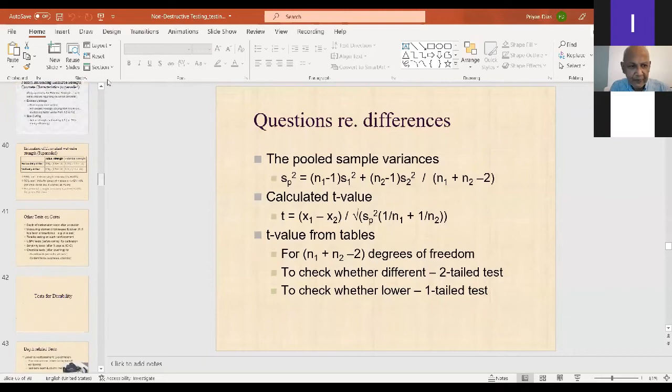So this is non-destructive testing and also assessment, meaning judging, right? This is part of an overall appraisal of structures. Non-destructive testing means the concrete is already in the structure, and you can appraise it at different stages. One very common case is if the cube test failed, as I mentioned in my last lecture, then you can look at the concrete in the structure. But if there are changes of use at midlife, or if the structure is very old and you have to decide whether to demolish it or not, then also you can do non-destructive testing.

Now, there are two broad ways of doing this. One is to actually sample the structure and get material properties, which is what I'm focusing on today, mostly with respect to concrete properties, although those concrete properties may not be the most important, and I will tell you about that also. Then you take these material properties and check whether they are sufficient, or use those properties to do structural calculations. So that is sampling and testing material properties. The other approach is to completely forget about the materials and do some kind of load testing with an expected load, and then see whether the structure is behaving okay.

Now, this non-destructive testing requires a lot of interpretation, and it is not as well accepted — there are sometimes disagreements — compared to, for example, something like a cube test. But the problem is that the cube test actually tells us about the concrete that was delivered to the structure. If you want to find out about the concrete in the structure itself, then maybe if you take something like a core, you will get a fairly direct idea about the in situ strength of the concrete. But even if you know the in situ strength of the concrete, you do not have any idea about the design load capability, for example, of the structural member. So for that, of course, you need to do a load test. Now I am going to concentrate on this area today.

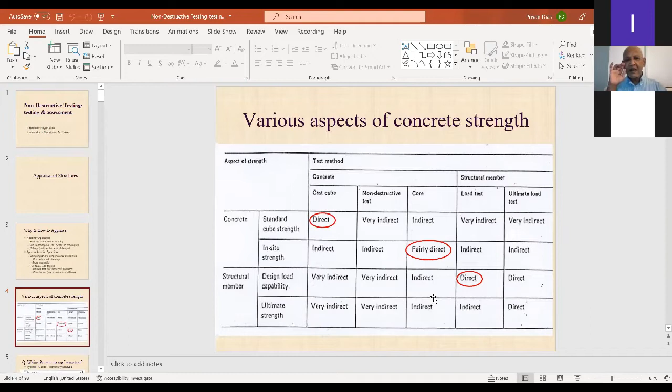Right now, I think some of you who have heard my lectures might be familiar with this slide. Okay, first let me use the pointer.

Now this is a simple slab. Those days we used grade 20 also, and steel FY 460, with these bar diameters and spacing. If all these parameters are at their design values, let us say the moment of resistance is 14.35, and we divide that moment of resistance by 14.35 itself. So the moment of resistance ratio is unity, with all parameters at these stated values. Now we can change one parameter at a time and see what happens to the moment of resistance ratio.

For example, if you think about the cube strength, instead of using 20, you make it half of that, that is 10 MPa, or you can make it double, that is 40 MPa. So you can see the cube strength has very little influence on the moment of resistance of a slab.

On the other hand, if you change the bar diameter, that will have a huge effect on the moment of resistance of a slab, or the depth of the slab, or the yield strength. So it is the steel properties mostly that govern the behavior of flexural members, especially slabs.

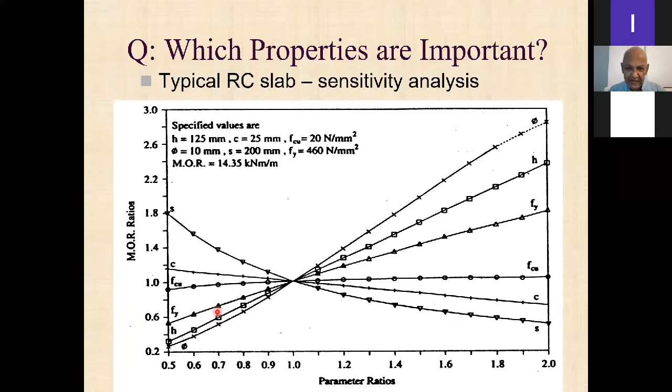Of course, where columns are concerned, the concrete is much more important, because concrete makes contributions of 69% and 53% as your reinforcement ratio goes from 1% to 2%. So concrete becomes much more important there, but much less for flexural members.

So when we are doing non-destructive testing, we should look at some of these other things also, steel properties and properties like cover, because cover will tell us, especially for structures that are mid-age or old age, about the durability conditions in those situations.

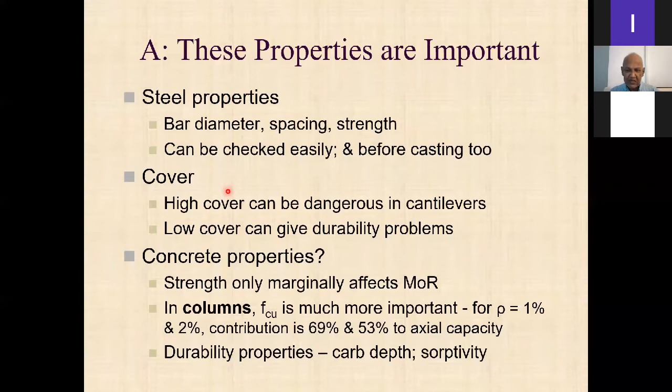So now there are different types of in situ tests. One is you have cores. Now the cores are like the gold standard, because you're actually taking the concrete and testing the strength, which is mostly what we are worried about. But there are others such as the rebound hammer test and ultrasonic pulse velocity, which give us a correlation with strength. So they are indirect tests.

So one way of doing it is to do some cores plus more indirect tests, and you calibrate with the core test results.

Now sometimes many contractors want to get away, especially when the cube test fails, with using indirect tests alone. This, of course, I strongly advise against, but in a comparative mode it is okay.

In other words, if you know that there is a particular place in the slab where the concrete is satisfactory because the cube test has passed, and another part where the concrete is suspect because the cube test has not passed, then you can do a rebound test and compare statistically whether there is a significant difference. I will go through that calculation.

I think some of you, I don't know whether you belong to those companies, sometimes they ask me to do this. Or if there are existing cubes that have not been crushed yet, you can think about calibration with that. And as a last resort, which I don't generally use now, you use an existing correlation, because I'll tell you about some of the problems regarding those correlations.

I have mentioned it here, I will highlight it later on. This gives you some idea, if you have a standard core like 100 or 150 millimeters, what is the level of reliability.

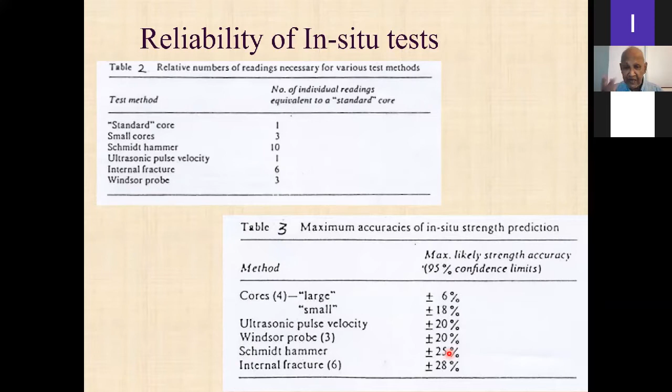So we make some allowance for that, especially when we are using the indirect tests, right?

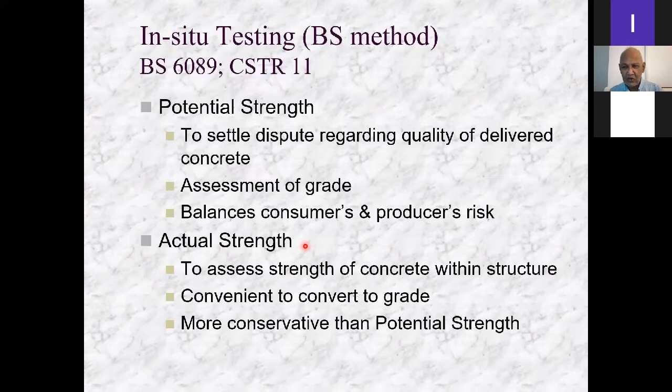Okay, so now we go to interpretation. Now there are some slides which I have blanked out, because these were done a bit earlier, Concrete Society Technical Report 11, BS 6089. In those days when you took cores, there was an idea about potential strength and actual strength. We don't go to that anymore, but this is just in case you want to look at these slides. Typically potential strength means, you are comparing the concrete in the structure with concrete that has been delivered, right? So you cannot expect the concrete grade to be the same in the structure as in the cube, because the cube is well cured and tested under lab conditions.

And we normally use a safety factor for that also. We know that the concrete strength in the structure is something where the FCU value is divided by 1.5, the partial safety factor for concrete materials. So if we get, say, 3 cores from the structure, and there is a dispute about the concrete that has been supplied, that mean strength - this is the old way. The new way of doing it is a bit different, I'll tell you that.

So then the mean strength you multiply by 1.3, and that is called the potential strength. If the potential strength is greater than the characteristic strength, we say compliance is met. If it is less than 0.85 times the characteristic strength, compliance is not met. And in between, of course, there is some area of uncertainty, right?

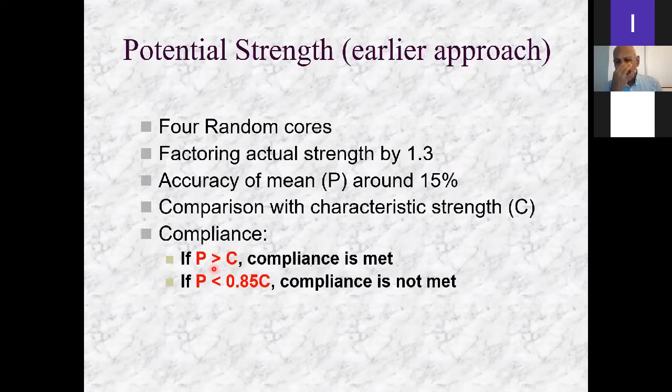Okay, now this is a bit of a different scenario - this is the new Eurocode. First of all, they say that the in situ strength - earlier we had this 1.3 thing, right? Here it is slightly different. If you take 1 divided by 0.85, you don't get 1.3, you get something like 1.17. So this is a bit more conservative, bit more conservative. And anyway, it also gives you a table.

So these are the standard grades, and depending on whether it is a cylinder or a cube - let's say this is grade 20 cylinder, grade 25 cube, that's the way it's mentioned. So in situ, you take 0.85 of that. So the grade you expect in the structure is only 17 if it's cylinder strength, or 21 if it's cube strength. That is used in the interpretation of these results.

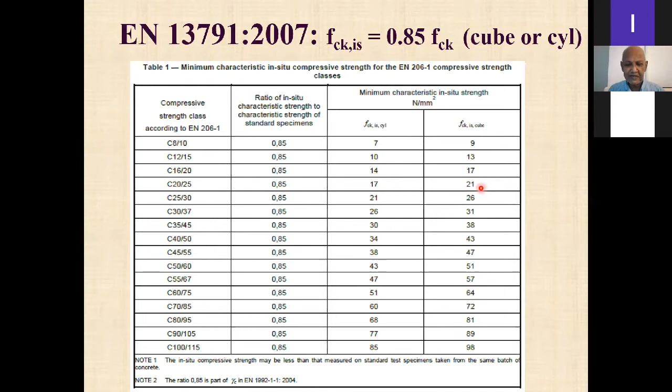So in an old structure, you can either use cores or use a calibrated method. Now if you use cores, you have something called approach A and approach B. Approach A means you are prepared to take 15 or more cores - very few people want to do that. But I remember many years ago, we looked at the Puttalam Cement Company buildings, there was a major renovation. I think we took a lot of cores there, but unfortunately this code was not available, so we did various other things.

Now, if you have fewer cores, 3 to 14 cores, you can use approach B, but it will be more conservative. I mean, you can get a higher in situ grade if you use approach A. So if you spend more time, effort and money, then you can get a better result. If you use less time, effort and money, then you have to be a bit more careful, and the estimated strength will typically be less than if you use the other approach.

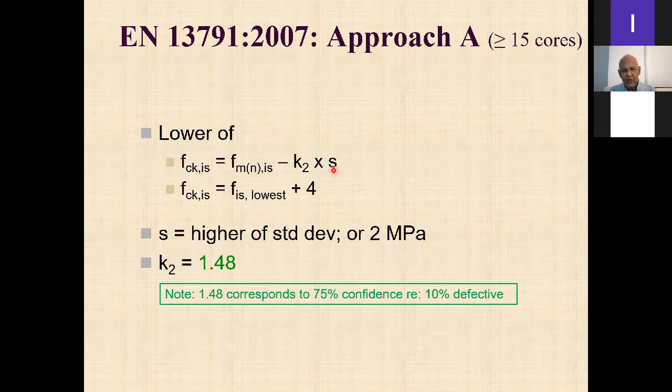And of course, the in situ characteristic strength should be the lower of this one or this one. This S value, you can actually calculate, or if it is less than 2 MPa, you have to use 2 MPa. And the K2 value that is used is 1.48.

Now, if you have less than 15 cores, the formula is similar to what you have there. Once again, you find the mean strength and you subtract. Now, the standard deviation is not there because there aren't enough cores in order to find the standard deviation. So depending on the number of cores you take, between 3 to 14, your K value will be very high here, but less here. So this will be the computed in situ strength.

Characteristic strength. But also, if the lowest strength plus 4 is smaller than this, then you have to take that one. So, like I have said before, if you take a less number of cores, because of these K values, the in situ strength will be underestimated. So it depends - you can take a fewer number of cores and get a smaller in situ strength, or you can take 15 cores and get a maybe better in situ strength. Depends on what you want.

Okay, so this is an example. Let's say this example, how do we implement this? So this is not a cube test, this is a core from which you get an equivalent cube strength. So there's a way to convert that. I might be able to cover some of that also.

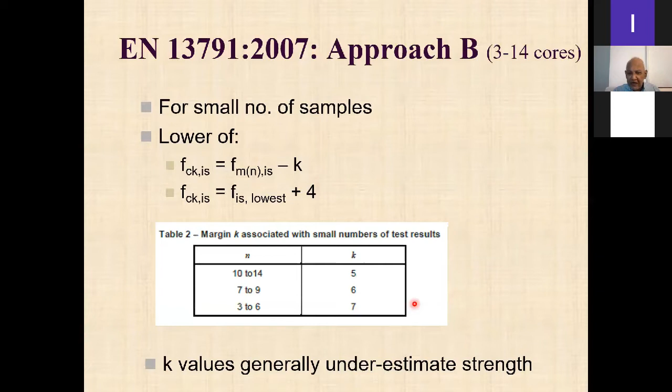Out of all of these things, the minimum is that. Now, what is the in situ characteristic strength of this? It's the mean in situ strength minus 6. Where do I get 6 from? If I go up there, n equals 7, so from 7 to 9 the K value will be 6. So 21.49 minus 6 will give me that value.

Or you can take this minimum and add 4 to this - that is, the lowest value plus 4. You get that one. But you must take the smaller of these two. So this is the one that you have to take.

Now this is the in situ characteristic strength. So what is the grade? In situ characteristic strength divided by 0.85. Remember I told you about that 0.85 factor that is used in this EN standard, whatever number it is, 17 something. So this is the grade.

So as you can see, you can use this grade in a calculation - if it is a building in midlife and you want to estimate whether it can accommodate a change of use. So if you have something like this, either you take this exact value or you say that it is grade 18 or grade 17.5. We cannot say it's grade 20, it's less than that. So this is how to get an in situ strength, in situ characteristic strength, and then convert it to a grade in case you want to use it in a design calculation.

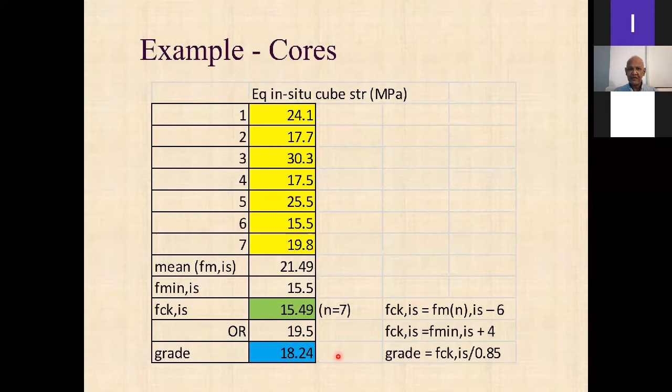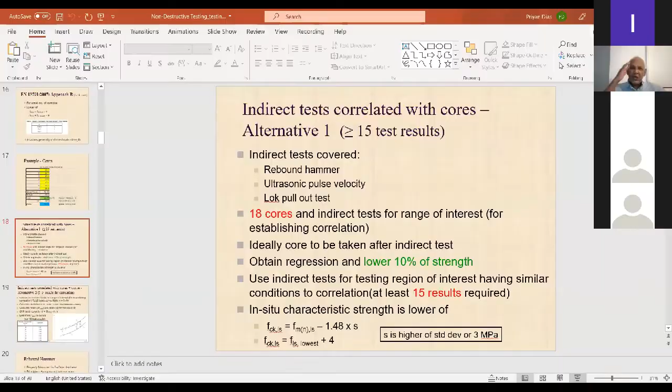Now these are alternative, indirect tests that are correlated with cores. There are these different kinds of tests that can be done. Here also for the correlation, you have to have not 15 but 18 cores, so a large number of cores. So actually this is useful, but to do the correlation we need 18 cores, so maybe not many people might be interested in doing this.

This is where I finished, I think.

Once again, you have to follow this, a similar thing as what we had earlier. Earlier, the minimum standard deviation was 2 MPa; now it is made 3 MPa. But unfortunately, you have to get a regression, and you have to take what is called the lower 10% of strength. I'll give you a real example to demonstrate that a bit later on.

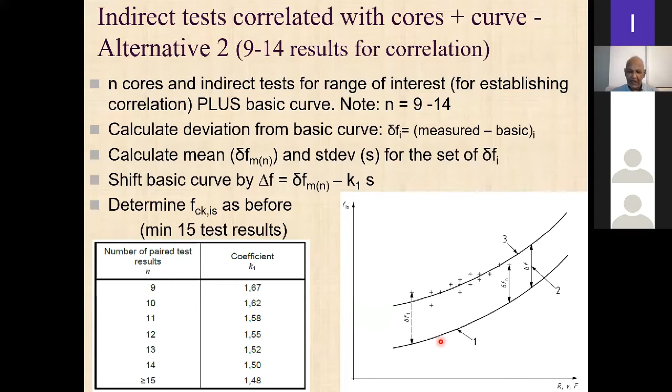This is how you do the calibration. Now, before we get to that, I will just show you some straightforward things - these different types of indirect tests that are available. So in a rebound hammer, what you actually measure is surface hardness, not the strength.

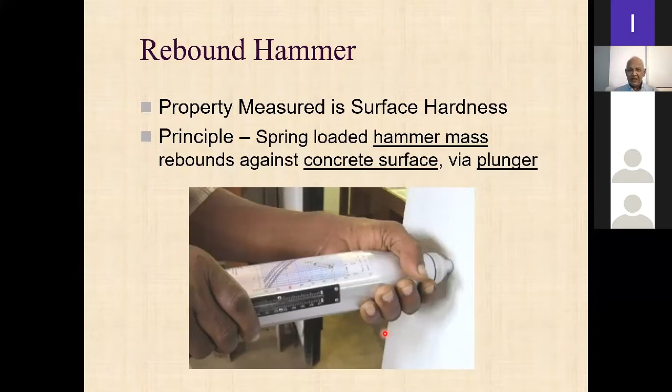Typically, you have to take 9 to 25 readings over an area of 300 square millimeters, that is 300 by 300. Typically, people take about 12 readings.

This result is influenced by the hammer orientation, whether it is horizontal or vertical, upwards or downwards. There will also be things like age, surface carbonation, moisture condition, and coarse aggregate type. All of these things will influence the calibration.

That is why I am not happy when people say they have taken a set of rebound hammer readings using a calibration chart provided by the rebound hammer supplier. Okay, but all of these factors will be different.

So actually you should try to ensure that the surface is dry. But then you have to look at things like how old the concrete is, what the coarse aggregate type is, and hammer orientation. The difference for hammer orientation, we can rely on what the rebound hammer supplier says, but everything else will be different.

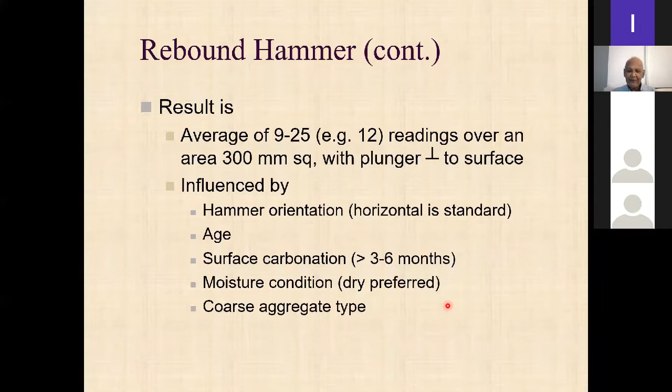Let me give you an example. This is from the early days, many years ago, when I just started at Moratuwa University. We did rebound number versus cube strength just to see. This is published in The Engineer. You can see that the cube strength varies with the rebound number.

Now it so happened that I thought you should have a straight line like this. Now I will show you what the Eurocode correlation is. It's not a straight line.

The other thing I want to show here is that we had some cubes that were wet and some cubes that were dry, in order to get a spread of strengths also. Now this correlation line is drawn only between rebound number and cube strength for the dry cubes.

Now if you take the wet cubes, they have a range of strengths, but a very small range in rebound number. And the rebound number is fairly low also. Which means that strength has no effect on the rebound number in this case.

So the lesson from this is, if you are taking rebound hammer readings, you have to ensure that the surface is dry. If it is a wet surface, then the rebound number will only be a reflection of that wet surface, the hardness of which will be reduced because of the moisture.

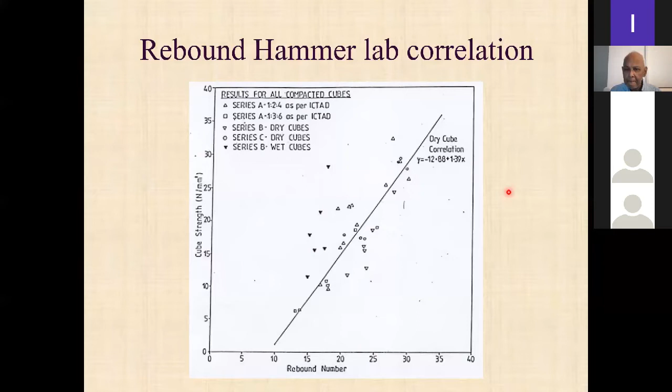Now, here you do not in fact find a straight line, in the Eurocode. There's a slight change here, the inclination changes slightly.

So what we are doing is, if we are getting a correlation between rebound number and strength, we have to get that correlation using 18 cores, and we have to find the difference between each one of those points and this line, so that we draw a line that is parallel to this. We cannot draw a straight line just using these points.

You might think that we get a set of points here and we just draw a straight line through that. No, you cannot do that. The code forces you to maintain this slope, this shape. That is the idea behind the correlation between this indirect test and the strength.

So your age and your carbonation and all of those factors will be different. That's why it's encouraging you to do this correlation. But this shape is only shifted vertically by a set amount. This slope remains constant, this slope remains also constant.

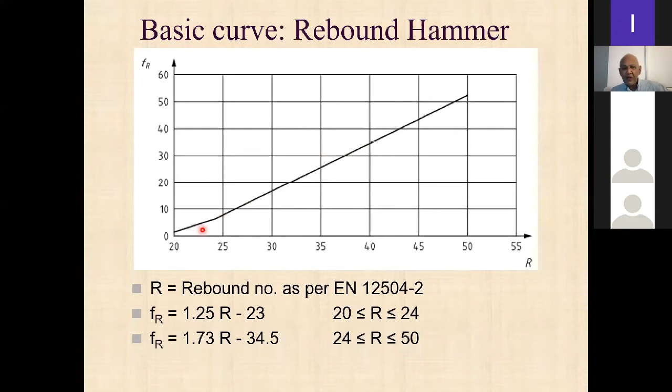Now, where ultrasonic pulse velocity is concerned, you have a pulse that passes between two transducers. The results are influenced by things like reinforcement, micro cracking, and moisture condition. The moisture condition is very important.

Now, in those days, people thought that the relationship between strength and this pulse velocity was given by a logarithmic expression.

So pulse velocity is on a natural scale, cube strength is on a log scale, right? This is from a very old paper, I think, not one of mine.

Let's say you have a wet cube strength here, and concrete gets put into a structure. The actual core strength will be here. So there will be a drop in strength because we cannot expect the strength in the concrete to be the strength that is in the lab. There will be this drop because of that. But separately, if you do a lab correlation, you will get something like that.

And this loss is the pulse velocity difference from the strength loss. In other words, this is the lab value, and this is the strength in the structure. So that pulse velocity loss is because of the change in strength.

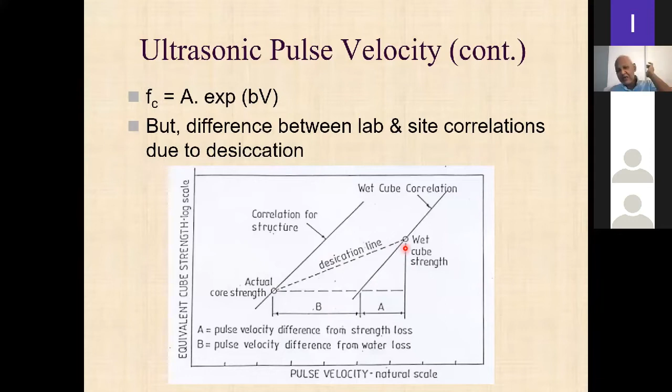I think this is from an early paper by a fellow called Thompson. Now, we actually did this - I think this is a structure that we investigated. We tried to use this, though in those days we did not have this line.

this effect. So this was a wet cube correlation. Separately in the lab, we also got a dry cube correlation like this. Now we got some pulse velocity and core test results from the structure.

So what we did is, in order to get this correlation line for the structure - well, those days we didn't take... now you're supposed to take 18 cores to get this correlation. So those days we would have taken maybe about 8 or 10 cores. So you have 8 or 10 strength readings and 8 or 10 pulse velocity readings. Now actually you can draw y equals mx plus c through that.

But here we are maintaining this m the same as this m in order to make this a parallel shift. And then you can get the optimum value of the intercept by doing a sum of squares thing or whatever.

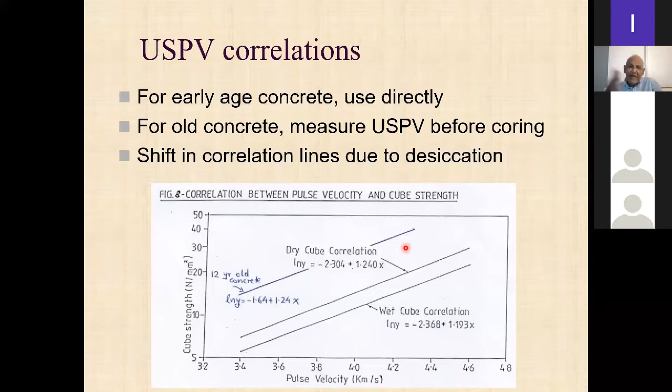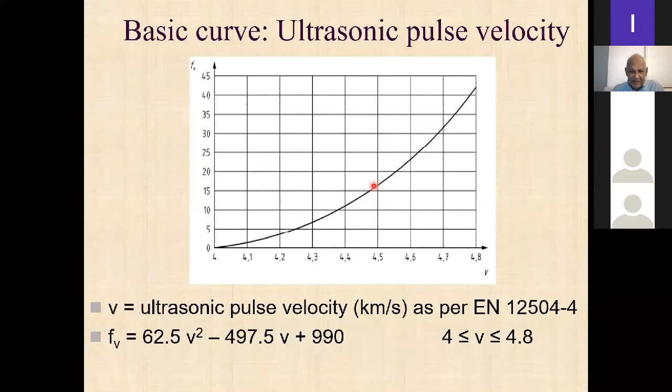So like I said, this is the basic curve. So when you get these correlation lines, you cannot move away from the shape of the basic curve. That is the main story here. And this is for the pull-out force, which we don't do very much.

Okay, now so when I do the examples, I will give you examples of these various things. Now, this thing I covered in my earlier lecture also.

If there is a dispute on cube test results, if you have 15 or more core test data, once again, then your in situ mean strength should be greater than or equal to 0.85 times characteristic strength.

Let's say if it's a grade 25 concrete, then you find the standard deviation from this. Then the in situ strength should be greater than or equal to this value, in order to accept the concrete. And in addition, the lowest in situ strength that you get should not be lower than this. Then you can say, well, the concrete that was delivered by the supplier, in fact, has this FCK value.

Now, suppose you have 15 or more indirect test data and 2 cores taken from the lowest strength areas. So what you do is you do, let's say, 15 rebound hammer tests. You take the 2 lowest rebound hammer values, take those areas, take 2 cores, 1 each from those 2 areas. Then the lowest value of the in situ strength.

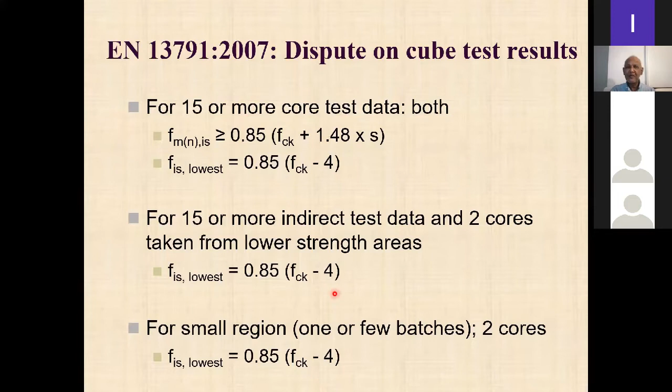Now I'm going to give you some examples, and these examples are wide ranging. So let's see whether we can finish. I better not ask questions because there are a whole number of you who have joined, and then it will be not manageable.

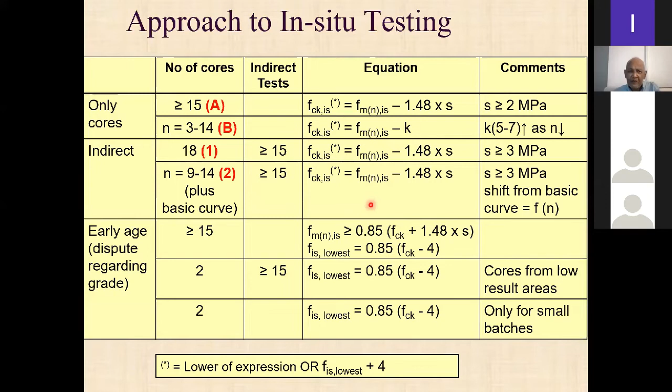Now, if we look at core testing, these are some slides on core testing, right? So these are repeating sometimes what I said earlier.

For approach A, you need more than 15 cores. Approach B, 3 to 14 cores. If you have a concrete dispute, at least 2 cores you will need, right? So minimum diameter of 100.

So if your thickness of the slab is less than 100, then you have to use smaller diameter cores because your length over diameter ratio must be greater than 1. But if you use smaller diameter cores, your variability will increase. So generally you need more cores, right?

Okay, so you can do visual examinations and things like that. And those days, once again, Concrete Society technical report required you to quantify these voids. You can still do that. I mean, that's good practice, right?

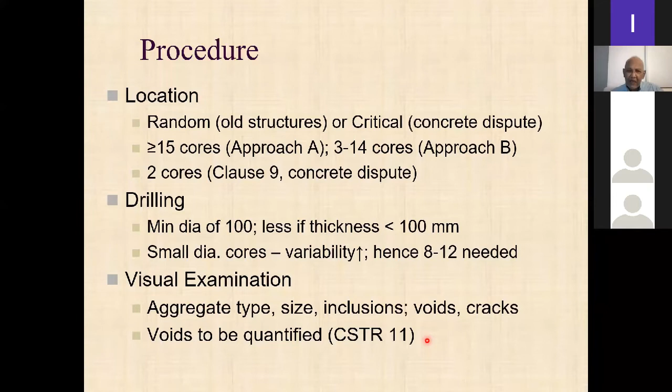So you can either do trimming or capping, high alumina cement mortar or sulfur sand. I know people use plaster of Paris sometimes, but then some of those you have to use these correction factors, right?

So it is better that you get all of these results also, density, compression testing and all of that, because once you take a core, you are in a sense disturbing the structure. It would be a criminal waste not to get as much information from that core as possible.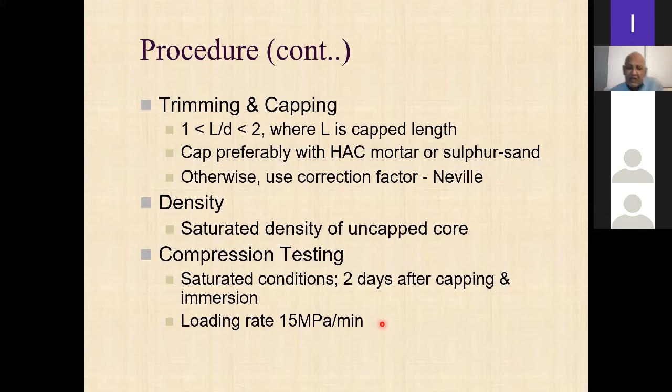Okay, so I will tell you more information again. This is only about the concrete, but even more you can, right?

Then this is just to indicate that, now when you test this in a compression testing machine, if length upon diameter ratio equals 1, then you will get a higher strength because you have this triaxial effect. Like you are trying to push this concrete together, but the concrete will try to expand because of the Poisson effect. It is prevented from expanding by the friction with the platen here. So there is a lateral force that is set up like this, right?

So because of that, this is concrete tested in a triaxial condition. Now, if you test length upon diameter equals 2, you get the same effect, but by the time you get to the center of this specimen, that triaxial effect would have disappeared. And therefore, we call this typically uniaxial strength, right? Anyway, because in our course we are converting to equivalent cube strength, like I said, we typically use length upon diameter ratios slightly in excess of unity, right?

There are ways to convert that in order to get the equivalent cube strength, right? Now, also the direction of drilling is important, right?

Now, this would be if it is a vertically drilled specimen. Now, if it is a vertically drilled specimen and this is a horizontally drilled specimen, if you think about a column, right? Now, the concrete is poured into the column like this, right?

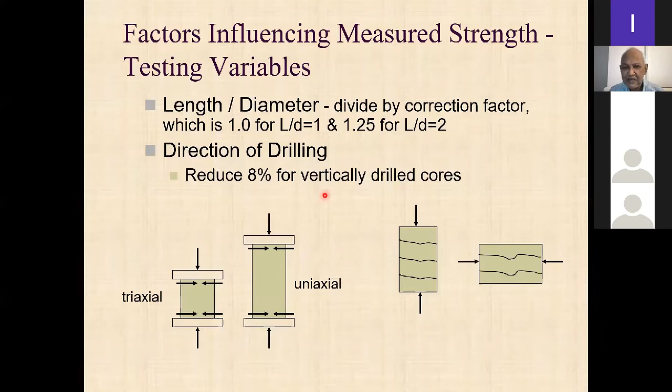And here, this lambda is the length upon diameter ratio, right? And so for a horizontally drilled core, this will give you the equivalent cube strength. And for a vertically drilled core, this will give you the equivalent cube strength, right? So this is the actual strength of the core, which has a L upon D ratio of this. Lambda is length divided by diameter, right?

The actual strength will be obtained using this formula for vertically drilled cores and this formula for horizontally drilled cores. If you want 95% confidence limits, you can say it's plus or minus 12%. We don't really use those very much if you use cores directly.

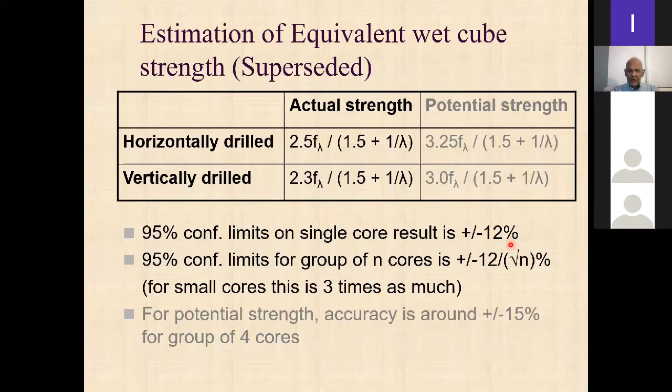Once you take a core, try to do all of these things in the core, because if you are doing an actual structural assessment, by the time the structure is in midlife, you're not worried about the concrete quality and whether the contractor supplied you the correct concrete. You're worried about whether you can do calculations and see whether this structure, which was normally used as an office building, if it is going to be used as a storage area, whether the concrete and steel properties are sufficient for that.

Also you may be worried about durability. So you measure the depth of carbonation, measure the element thickness and the cover. If you measure the element thickness, you can get an idea about the actual depth of the concrete. You may even, with some judgment, be able to reduce the partial safety factor for dead load, because you now have a very accurate estimate of the element thickness.

But that requires some expert judgment. Ideally, if you are drilling a slab, say for a 12 or 15-year-old building, instead of avoiding the reinforcement, you should try to cut through a reinforcement, because then you can take that little reinforcement piece out, do a small coupon test on it, and test the reinforcement strength. Like I showed in that earlier slide, the yield strength of the reinforcement has a big effect on the moment of resistance of the slab.

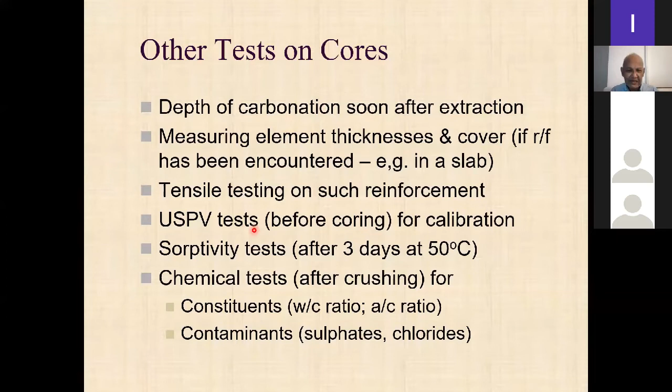There are other tests also that can be done. These are some tests for durability. I'm going to skip the ones that have no direct influence on in situ testing, but cover to reinforcement is very important.

In addition to information about durability, cover will also tell you something about the lever arm of the slab. The cover meter can also be used to locate where the reinforcing bars are. Remember that first slide I showed about the moment of resistance ratio — the bar diameter and bar spacing have a big effect on the moment of resistance. So even if you use the correct yield strength and correct bar diameter, if the spacing is 175 millimeters instead of 150 millimeters, the moment of resistance will reduce. Using a cover meter, you can get the spacing of the reinforcement.

Okay, so for depth of carbonation, you also have to spray as soon as you take the core on a freshly cut surface, which is the core surface.

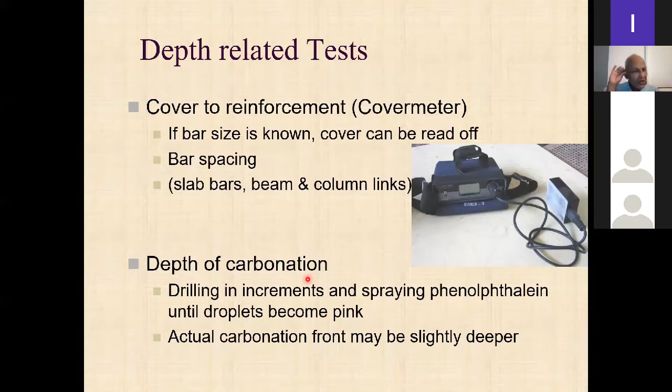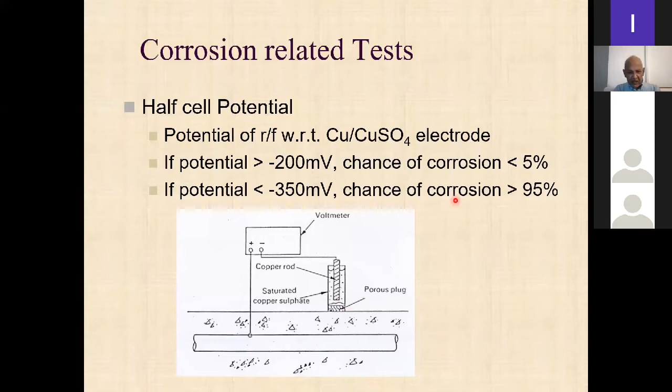You have to get the depth of carbonation, right? So half cell potential is a particular piece of equipment that can be used. It measures the potential between a copper sulfate electrode and the reinforcement. You connect it to the reinforcement, and depending on the potential, you have different chances of corrosion. Then you can do what is called a resistivity test, where you supply a current and measure the voltage, and from that you get the resistivity in ohm centimeters.

If resistivity is less than a certain value, corrosion rate will be very high. If it is greater, corrosion rate will be very low. So the basic idea is, if your concrete is very dry, and you are confident you can maintain it in that dry state, then even though the depth of carbonation has gone past the reinforcement, you don't have to worry so much, because the resistivity is high and the corrosion rate will be quite low.

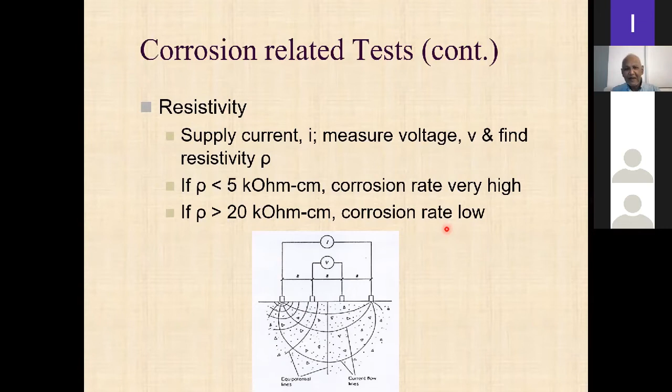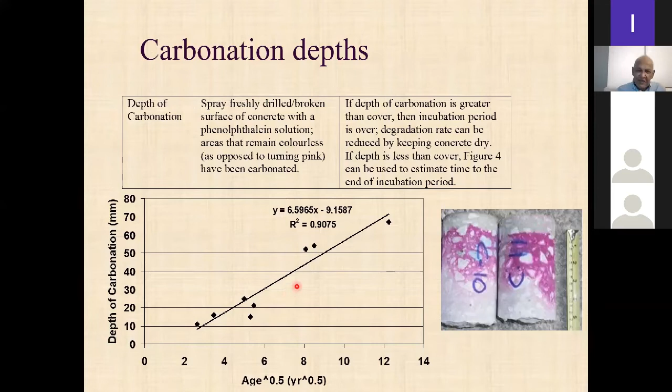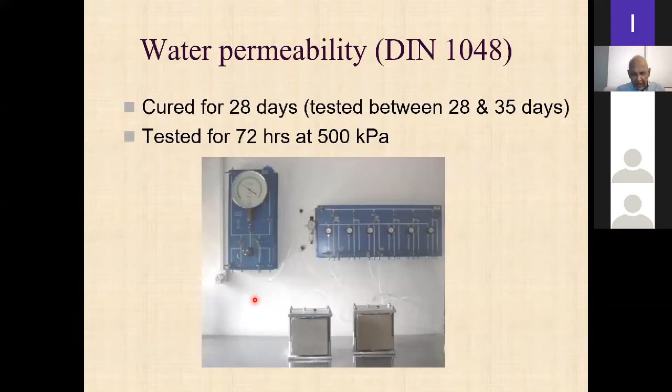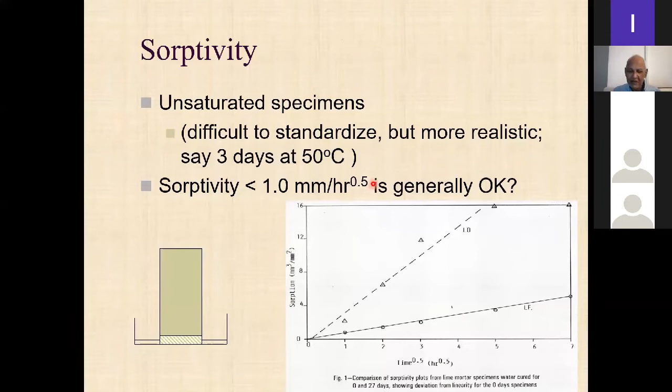We can do this water permeability test. That is not so much an in-situ test, but is more to approve the concrete before it is used. So these are some results. Sorptivity we can do on the core itself, but there isn't very much guidance on which sorptivity values are acceptable. Maybe there is more recent literature on this, but typically these are the values we used to use earlier. I will not go into details of that.

Full-scale load testing can be either in-situ non-destructive tests, or if you can actually remove a member or precast members, you can test it to destruction. You should not carry it out before 28 days of age. You must have scaffolding so that you can mount dial gauges, because load testing actually measures load versus deflection. Also, in case there is a failure, the scaffolding should be able to catch the elements with a minimum drop.

When you read these gauges, it is better to read them remotely using a telescope, in case there is some kind of unforeseen accident.

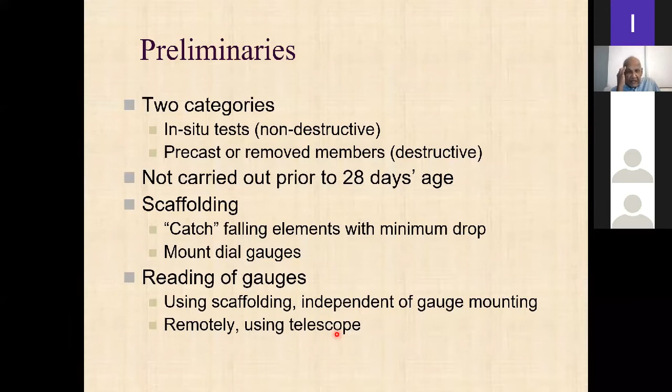So the objective is to ensure that the element is in the elastic range and that the member experiences the required loading. In other words, if you are testing a beam, there will also be a slab. You have to load the beam as well as the slabs on either side. Even if you don't load the slabs, if you load a beam, the slabs will take part of the load to the other beam. So you need to assess what the actual load coming on that beam is.

When you are applying the load, you should eliminate arching action. For example, if you are using sandbags, sometimes the load may not go directly vertically, but may arch across the sandbags like that. There are various details I can't go into all of. So there are two kinds of approaches: you can see whether the serviceability requirements are being satisfied.

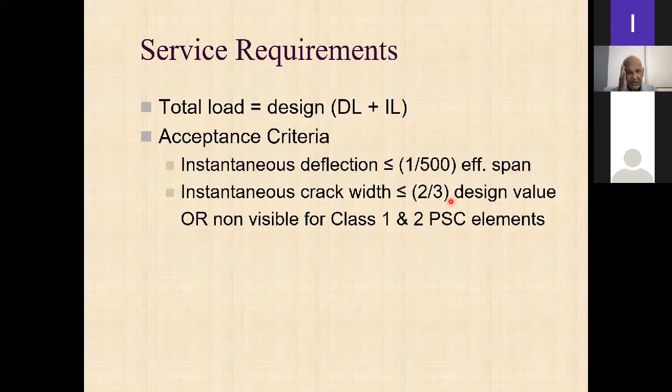So then you just have the design dead load plus imposed load, and these are the acceptance criteria: instantaneous deflection and instantaneous crack. If you want to get the design strength, then you use dead load plus 1.25 of imposed load, or 1.125 of dead load plus imposed load.

So you apply the load and remove it incrementally. You have to do two tests with one hour in between, and you can consider even doing a third test with the load left for 24 hours. The acceptance criterion is the percentage recovery after the second cycle.

Now, so you have a loading and then you unload, so you get what is called the percentage recovery. The percentage recovery after the second cycle should be at least equal to the first cycle, and it should be greater than 75% for RC and class 3 PSC, and 85% for class 1 and class 2 PSC.

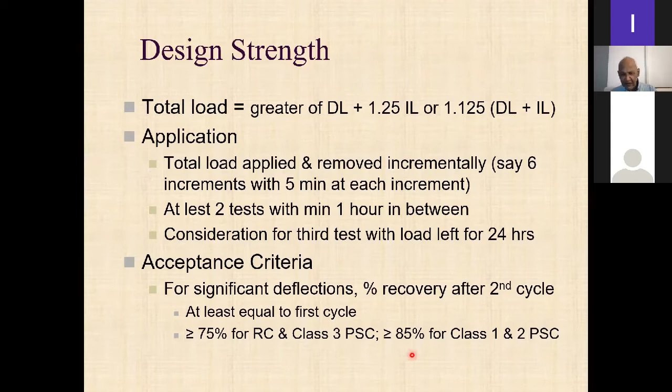So basically, if this is deflection and that is load, you load it and then unload it and see whether it is basically in the elastic range. That is why the recovery has to be at least 75%. And the other approach, of course, is to test for failure, but this is typically used for things like precast concrete elements.

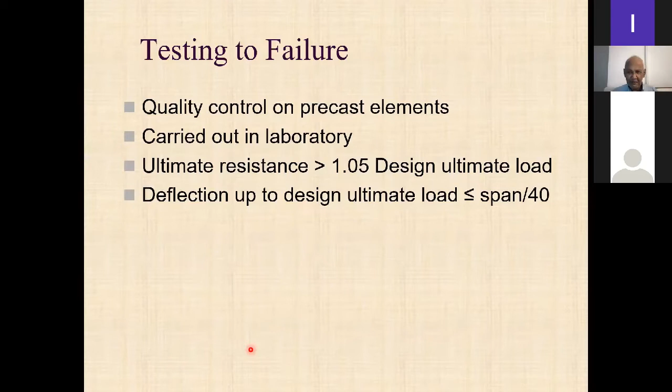Okay, now a few more case studies. I think this result I have already shown you.

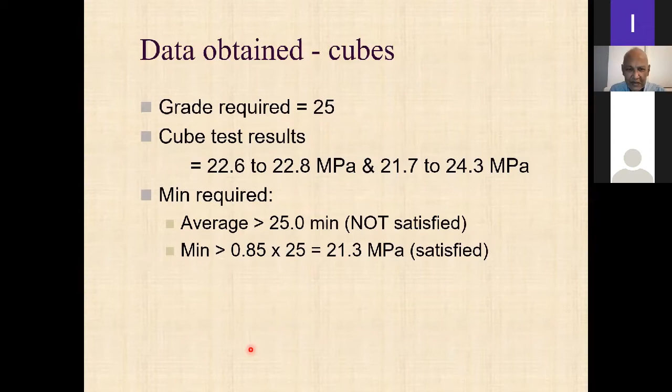Now the rebound hammer, let me try to spend some time on it, because it is a test that many people want. It's an easy test to perform, provided you perform it in this comparative manner, in other words, comparing satisfactory and suspect concrete.

So you had grade 30 concrete at 4 months of age, grade 40 concrete at 8 months of age, which is not very good because after 6 months there's sometimes too much carbonation. Anyway, what we want to compare is suspect versus satisfactory. So for grade 30 also there was suspect and satisfactory, grade 40 also suspect and satisfactory. These were in different parts of the structure.

So you have a list of suspect readings at different locations, and different locations where you have satisfactory concrete. You don't actually need the same number of readings either, but you need about 15 to 20 readings typically, maybe you can manage with about 12. It just depends on whether it makes statistical sense. Here you have less because there's less area with grade 40 concrete.

So you get the means, then you get the standard deviations, then you get what is called the pooled sample variance. It's there in the next slide: SP squared is n-1 into S1 squared plus whatever. Then you calculate the t value, which is this mean minus this mean.

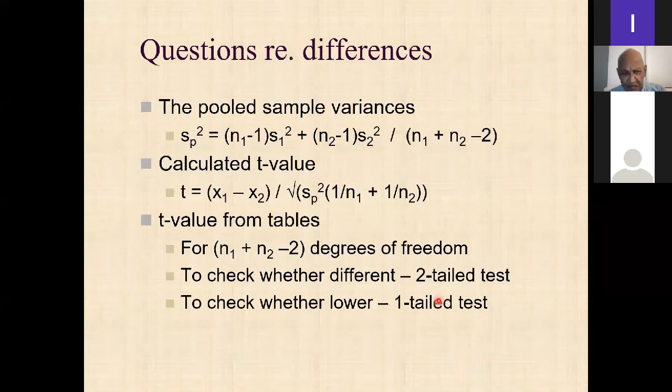Okay, I have put this down again on this slide. So the level of significance is the risk of a null difference being accepted as different. So if there is no difference, for it to be accepted as different, a 10% level is a very high risk. A 5% level of significance is an average risk, and a 1% level of significance is a very low risk.

So if you want to demonstrate similarity, show that the t calculated is less than t tables at a 5 to 10% level of significance. To demonstrate a difference, show that the t calculated is greater than the t tables at a 1 to 5% level of significance, right? Okay, so let's go back to this.

Now, instead of using a 5% level of significance, if you use a 1% level of significance, and if your calculated t value is even greater than that -- you can measure t from this way to that way, or that way to that way, we're not worried about the sign -- if your calculated t value is even beyond this 1%, it means that it's definitely different. It means there is definitely something wrong with the concrete.

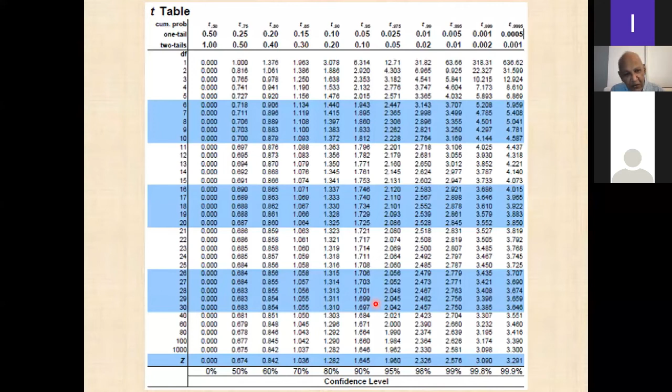So the concrete is suspect, right? The reason why we say this is suspect and satisfactory is because the cube tests failed here. Here we are going into the structure to see whether the concrete in the structure, which is supposedly suspect, and the concrete in the structure, which is supposedly satisfactory, whether there is a difference between that or not, right?

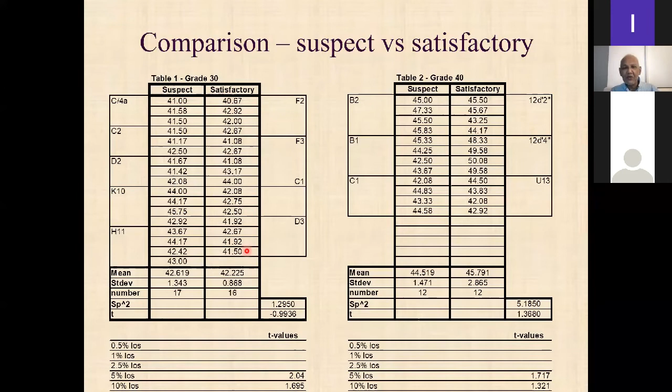So this is the kind of way that you can use rebound hammer testing. The testing is fairly straightforward, easy to do, not much expense, right? The analysis is a bit complicated, and you have to get your head around that analysis.

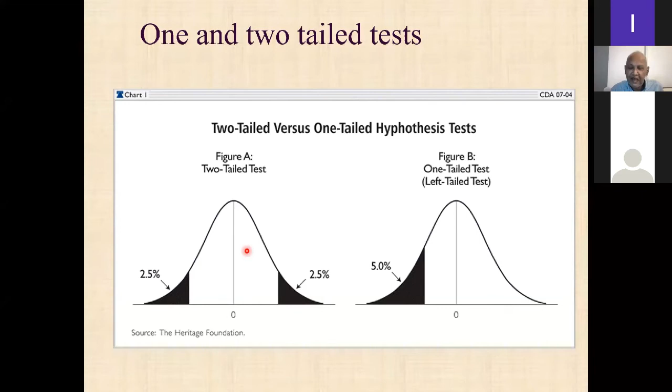When you're doing it, you have to make sure that both the satisfactory and suspect area you definitely test. The comparative satisfactory area must be of a similar age and similar grade to the suspect concrete, right? Okay, this is everything that I described earlier in words, so I'm not going into that. And this is another comparison of that nature.

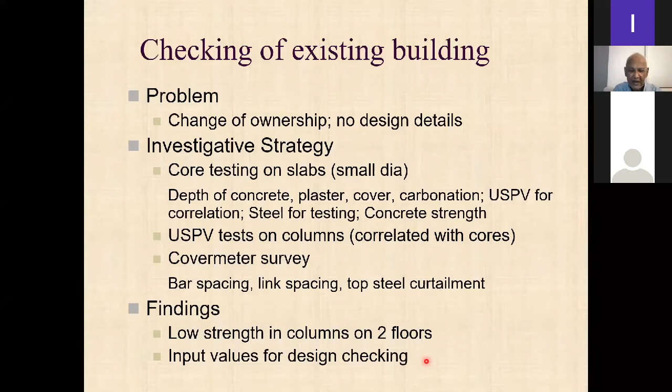Okay, now I'm going into another area, which is midlife assessment. So this is where change of ownership is concerned, no design details. There were various strategies that were used, and the findings were that the column strength was a bit low on 2 floors, and we found some input values for, I think, design checking that was done by the State Engineering Corporation.

So these are the cores, these are the typical kind of values that you can get. This is the depth of the top plaster, bottom plaster, the actual concrete slab, so you can see the variation of concrete slab thicknesses. Then the carbonation, cover to steel if we've drilled and cut through the steel, then the pulse velocity—all of these things you can get from cores.

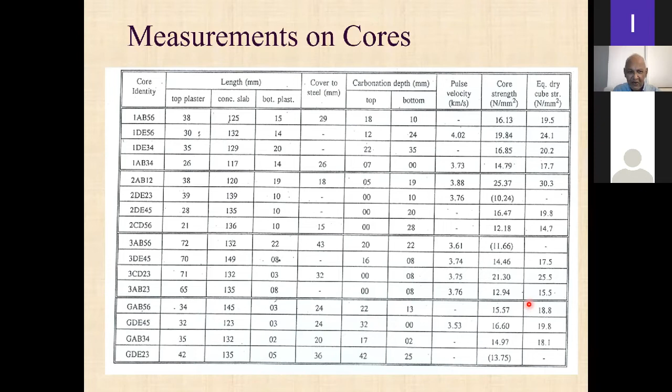Some of the statistics we got: the mean and standard deviation for slab thickness, concrete cover, depth of carbonation, yield strength of the steel from what was cut, percentage elongation and things like that. Then, using some of the methods available at that time—not this new Eurocode—the estimated cube strength for the cores, and this is for the columns.

Now the columns, of course, I think we did not take cores. We used ultrasonic pulse velocity and correlated it with the cores that we got from the slabs.

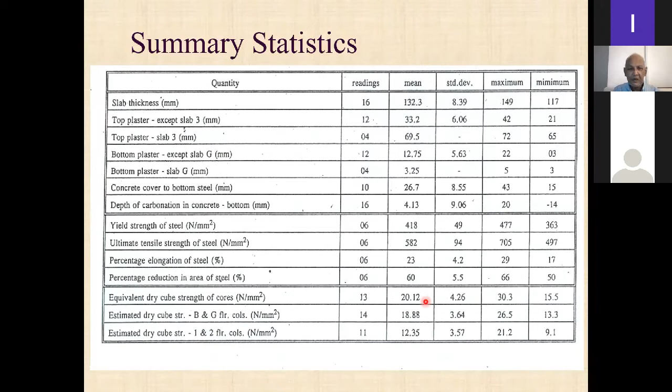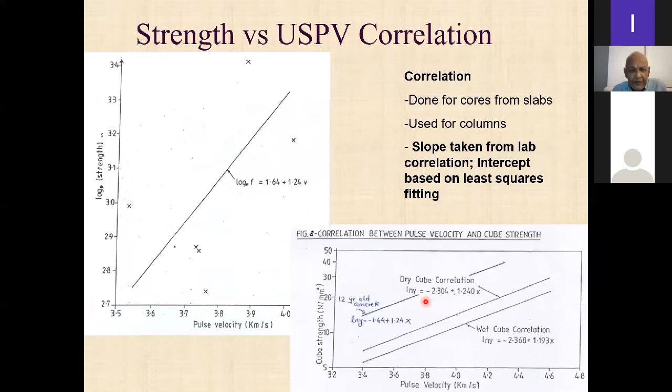Right, okay. Now this is something I highlighted earlier. So this is the pulse velocity here—I gave you this method, right? This is the equivalent cube strength.

Now we are trying to test a much wider area using pulse velocity, and we are trying to get a correlation between these cube strengths and pulse velocity taken at the same locations. First I want to say that I am just demonstrating a simple correlation between this and this.

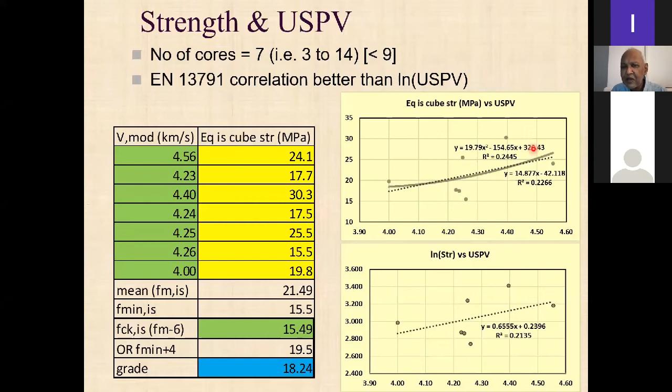So these are the different points, but we assume that this is the correlation curve. Now if you just fit a parabolic curve like that, you will get different values and different coefficients here, but you're not allowed to do that. You have to put this factor there and that factor there, because only that will make it parallel to this basic curve.

So you get this difference and you do it, but then again you have to reduce this one from that—I will not go into that. But from that, there is a way that you take that standard deviation and reduce it to this actual correlation curve which you get here. So it is all given in the code of practice, and with a little bit of thought and care, you can get that.

Okay, getting close to the end. So this is the condition assessment for a 70-year-old building. I'm just telling you the different kinds of tests, giving you a flavor of the different kinds of tests. Now here also you get carbonation at the top and carbonation at the bottom.

This is just to highlight that in most structures, carbonation at the bottom will be greater.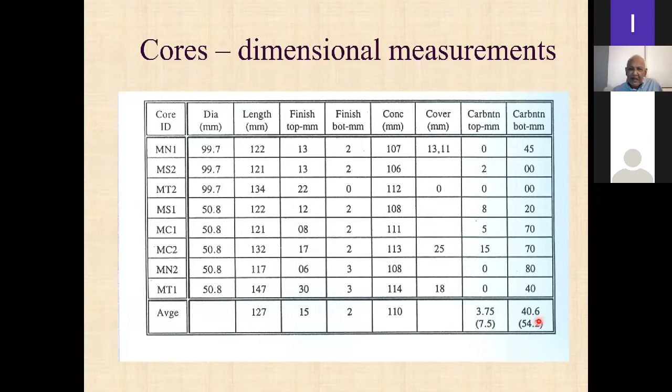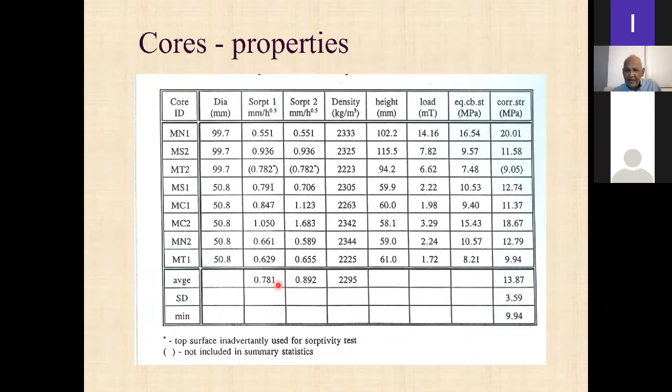And these are some other properties that were done. Sorptivity, I said if the sorptivity is less than 1 millimeter per square root of hour, then it's generally okay. This is how you do the sorptivity test. You have a sponge here. You heat this at 50 degrees centigrade for 3 days, and you calculate the amount of water absorbed into that semi-dry specimen, not completely dry, but dry to a standardized sort of condition.

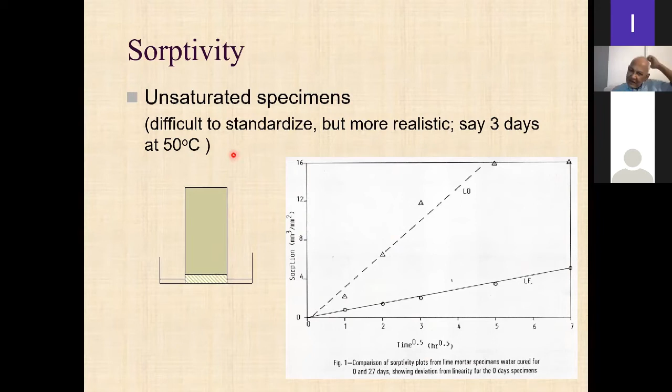Now, I have not explored this in great detail, but...

Very often the top of the concrete has a thicker rendering, while the bottom of the concrete has only a small soffit plaster. So for the concrete to get carbonated from the top, all of this rendering also has to get carbonated. Separately, most of the slab is probably in sagging mode, and therefore at the midspan of this slab, it's in tension, and the chances are that something in tension will allow external agents to penetrate more easily. This is just a theory, but typically you will find that the carbonation depths are greater at the bottom of these concrete slabs.

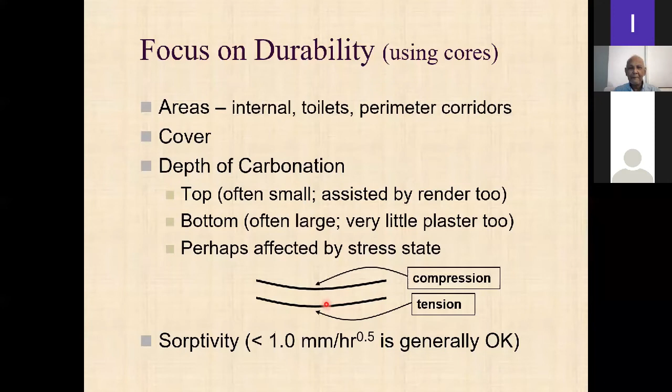In this particular project, we found that carbonation exceeded the cover. Significant corrosion was present only in moist areas, typically areas you have to be particularly careful of, like toilets and perimeter corridors. So very often what you have to do is repairs there, waterproof it, and try to keep it dry.

Under all situations. Now this is a 100-year-old structure. Before I talk about this structure, we had an external examiner at Moratuwa called Professor Tim Ibell, and he has written an article in the Structural Engineer Journal called 'Nothing is Better Than Something.' I think most of us will think that something is better than nothing, but he has written a very provocative article called 'Nothing is Better Than Something.'

That is because he and many other structural engineers like him are very concerned about the carbon contributions by the industry, carbon dioxide emissions. So he is suggesting to structural engineers, try to keep these old structures going, do not demolish them. Because if you demolish, that means you have to put up a new structure. And while doing that, try to maintain your structural engineering practice as well. So you have to think a bit carefully about what kind of value you provide to clients, even if you are telling them not to demolish and reconstruct. So it's a bit of a challenge for structural engineers.

Anyway, speaking for myself personally, I like these older buildings. I think they add to cultural heritage and things like that. So as far as possible, it's better to try and maintain them.

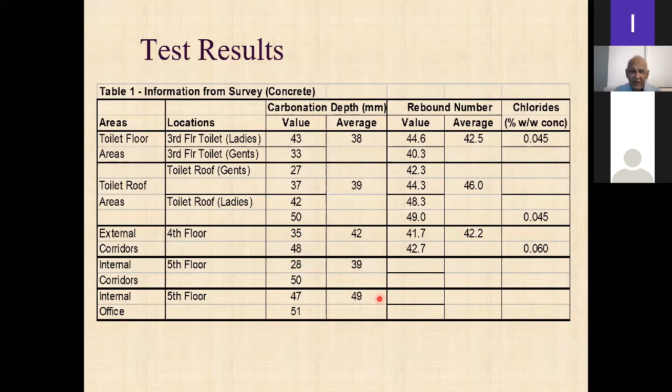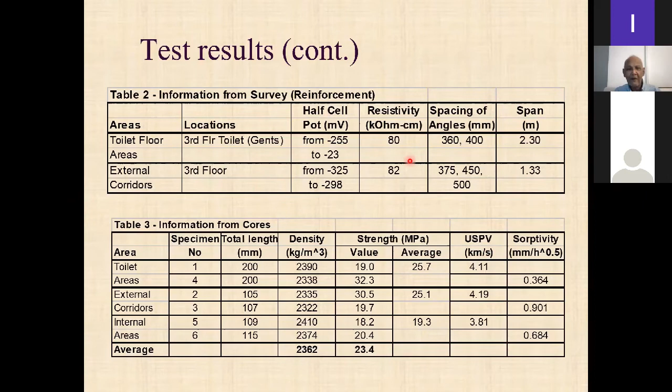So basically we gave a recommendation not to demolish the structure. The question here was, is it safe? Do we need to demolish this? So the findings: depth of carbonation exceeds the cover. Depth of carbonation is greater in dry areas. Now, that is also something interesting about carbonation.

Structures will carbonate faster if it is dry. But if it is wet, then you will find conditions suitable for corrosion, because that moisture enables the formation of a corrosion cell.

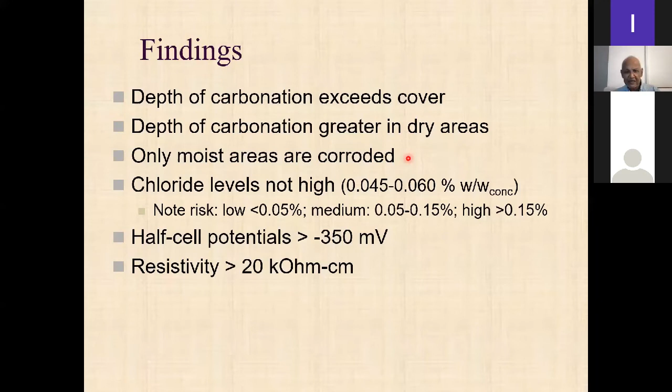Chloride levels are not high. Half cell potentials are greater than -350, resistivity greater than this threshold. And therefore, we said okay, you can still keep the structure.

I think this is the last section I have on fire damage. Sometimes it's a bit difficult to do these assessments, and a lot of times you have to use some judgment. There is some guidance given in a Concrete Society technical report, which I may have mentioned later on, but I will show you some of the things that we have used.

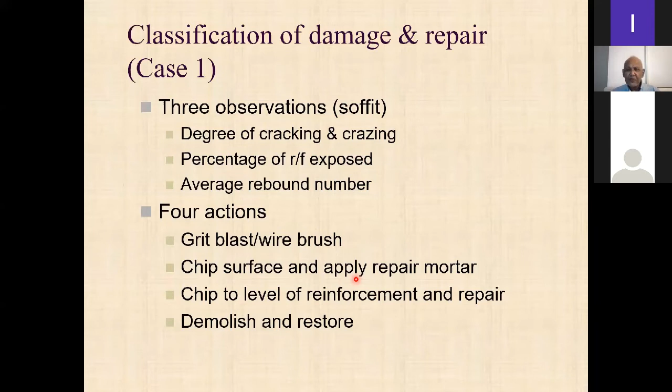Here you can get a visual idea about the degree of cracking and crazing — this is medium and high. Percentage of reinforcement exposed — once again, low, medium, and high. And this is the average rebound number.

The rebound number gives an idea about whether there is likely to be spalling, because if it's a low rebound number, that means the slab is hollow. So based on an examination of these different conditions...

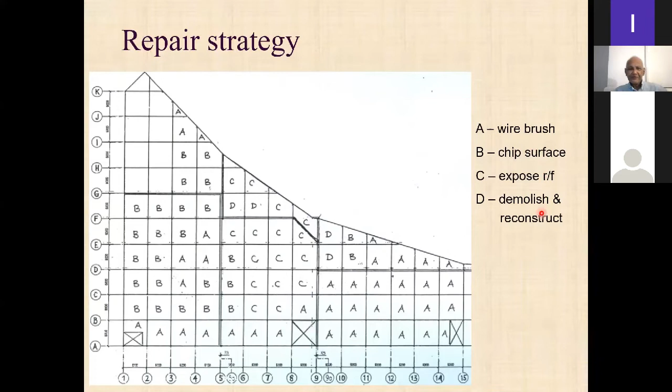So you have to use a little bit of judgment, and these are the different kinds of methods available: just wire brush it, chip the surface, and then reinstate it; expose the reinforcement and use repair mortar; or here, demolition and reconstruct. This gives you some visuals.

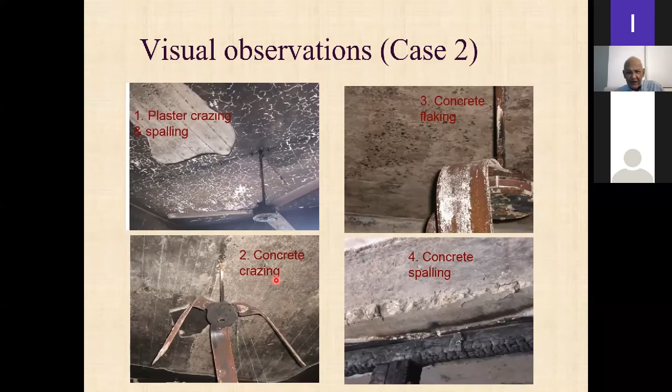This is plaster crazing, this is actually concrete flaking, this is crazing in the concrete, and this is concrete spalling. So you go from this, where only the plaster is affected and the concrete inside is okay, to here where the concrete itself is crazing — meaning a lot of small fine cracks like this — to here where the concrete has flaked off, and here where the concrete has actually spalled off.

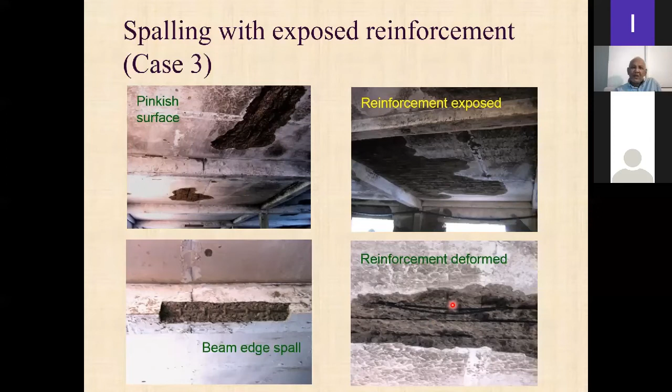So this is another case — sometimes you get a pinkish surface. You have reinforcement exposed in a large area like this. Beam edge has spalled, and the reinforcement has deformed like this, probably because of the heating. The concrete has got chipped away. This reinforcement is trying to expand because of the heat, but it can't, and therefore it sort of bends like that. So these are some of these levels of damage and repair.

Now, in this particular field, I have done some work in the past, and anything I said about the Eurocode is quite up to date. But some of these other things, there may be more recent versions of these technical reports, though the principles are similar. Okay, so I think I will stop there, and maybe I don't know whether I should stop sharing, but I will stop and entertain questions.

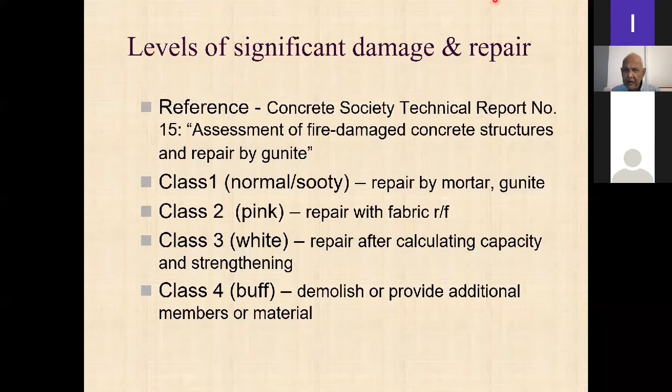Is somebody going to ask? Do I just look at the chat for the questions, or what? Okay, no, maybe I have to stop sharing this. So far there is nothing on the chat. Maybe you can even unmute yourself and ask questions, because there are so many people who seem to be present.